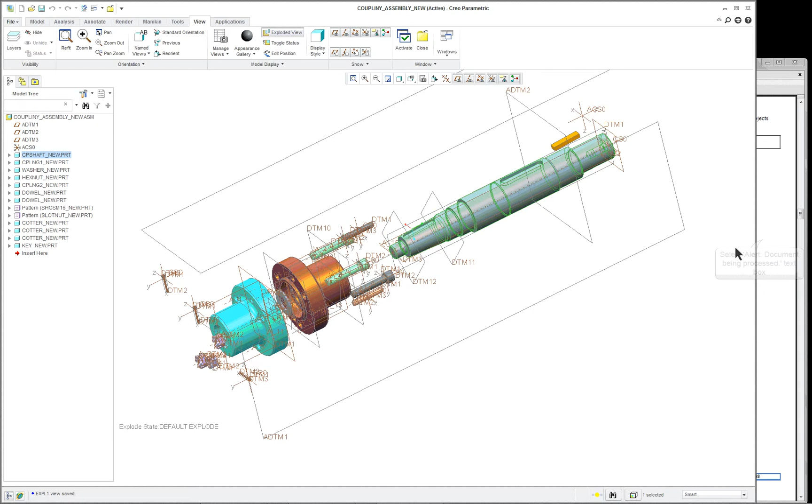First in this lecture we'll do just the coupling shaft. All the dimensions are provided for you, but as far as the step-by-step, we'll go over how somebody else approached this project. It's not necessarily the best way to do it. In fact, there are a bunch of things we'll talk about being poor procedures and maybe not the way you should do it for the correct design intent.

So I'm going to open up the shaft and we'll take a look at it. I'll go to my tools and model player, and as always we'll back it up to the beginning and we'll step through it.

One of the things you'll notice is they did all of this work with one command. This feature has actually too many aspects to it. There are ways to simplify it, and if you don't simplify it, then you should build it piece by piece, and we'll show you what we mean by that in a second. You have the taper here. This is the most important aspect of it.

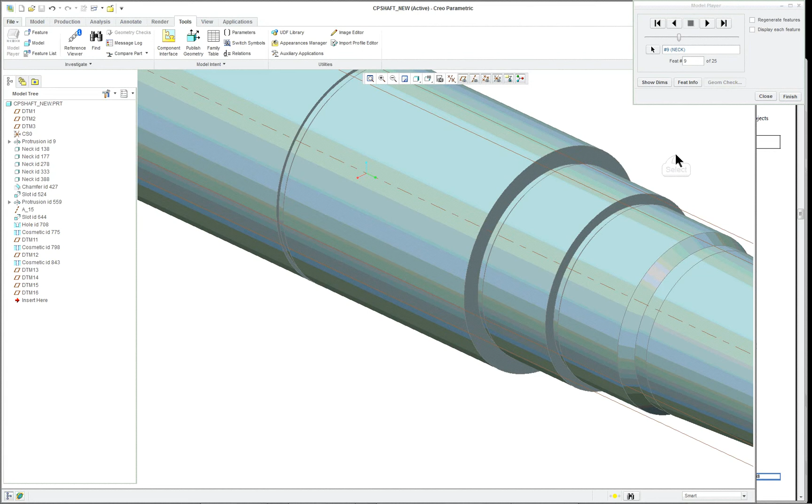So the very first one is a cut called the neck. This is an old style command. It's really just a revolved cut. You can see that was put in here. Same way up in the front here, another neck command. The neck command really is just a fast way of doing a revolved cut. Let's go and refit it.

Some of the choices are made for you because it's going to be a default. But again, we don't have that particular feature turned on, so you're not going to see that in the commands in the dashboard. So we have a lot of small items, and then we have this slot that's put in the top.

Another cut. This one's a radius actually. It's a radial cut, kind of an odd way to do it. And we have our slot here. This will be the one that we have to do a little bit of construction geometry to get.

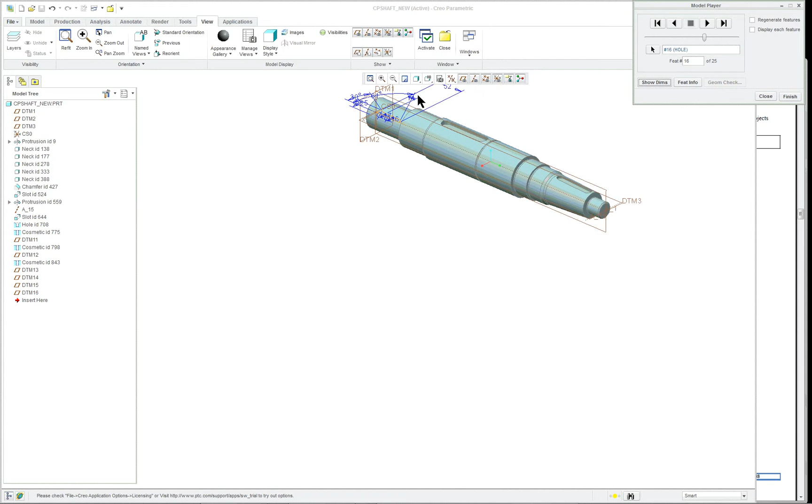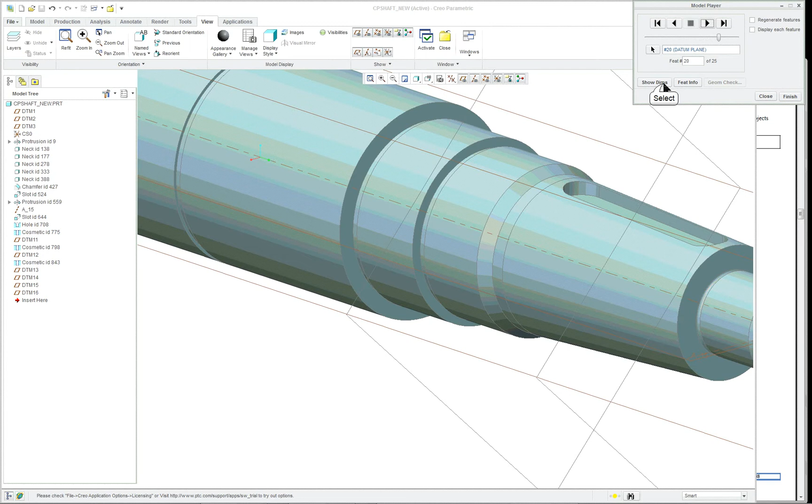And in the back here we have a hole, kind of a complicated hole. You can't use a standard hole here, and that hole has a thread on it. We have a variety of other types of cuts and things we're putting on here. Most of the items are fairly simple, except for maybe the tapered slot here and the hole in the back.

We have some variety of datum planes that we're putting at the very end. These datum planes are there so you have an ability to cut sections along the part when you're doing the drawing. You can see the sections have been provided for you - Section A, B, C - and needed datum planes to pass those sections through.

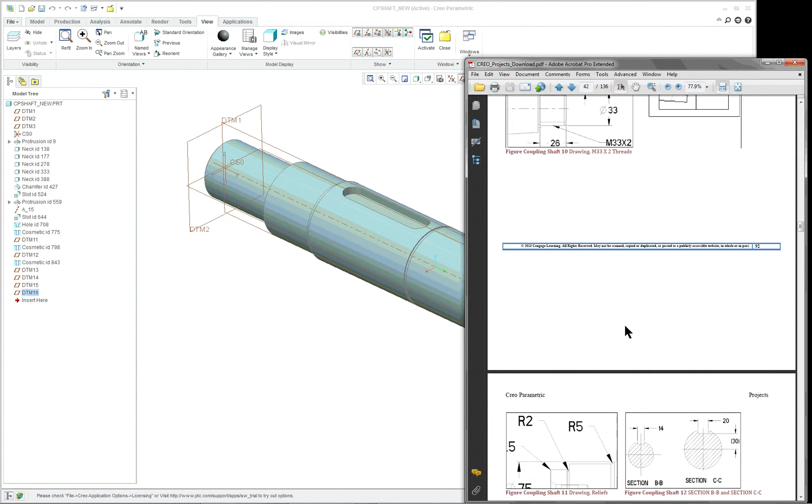All right, so let's look at the first feature. We'll go to the placement, and you'll see this is quite complicated. What we want to do here is turn our section. I have a cold, so I'm sorry about my voice here. And we'll click on this.

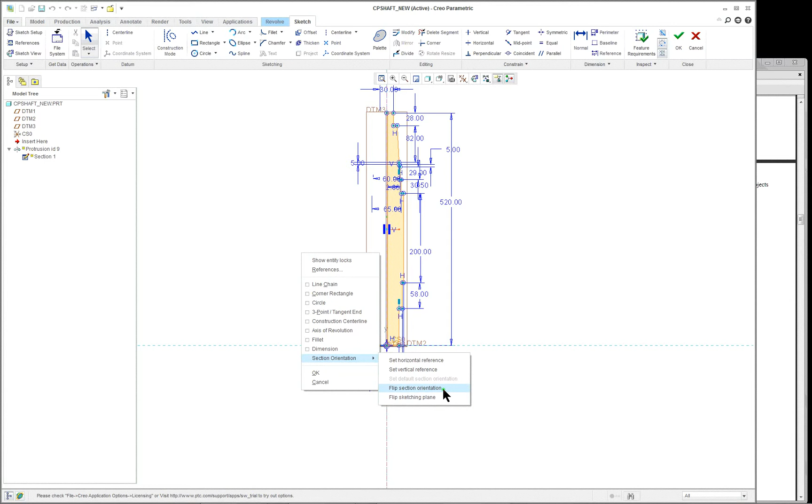Let's see if we can get it to go. Section orientation, set vertical reference - how about this one? All right, and I'm going to close my model tree over here so we can see a little bit better.

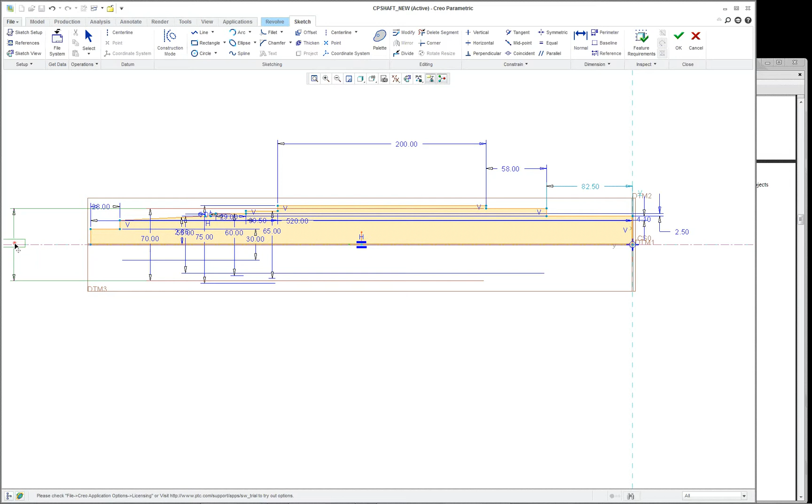Now we'll see we have a lot of diameter dimensions. We do have a lot of stacked up dimensions too, so I'm not saying this is the best way to do it. You're going to have to use these dimensions to create the part, but you also might want to do a better dimensioning scheme and not have so much tolerance stack up here. The most important thing here is this dimension, the 2.50. That's one of the most important things. Making sure that this, kind of an odd size to it here, whatever it says in the book, make sure you go by it.

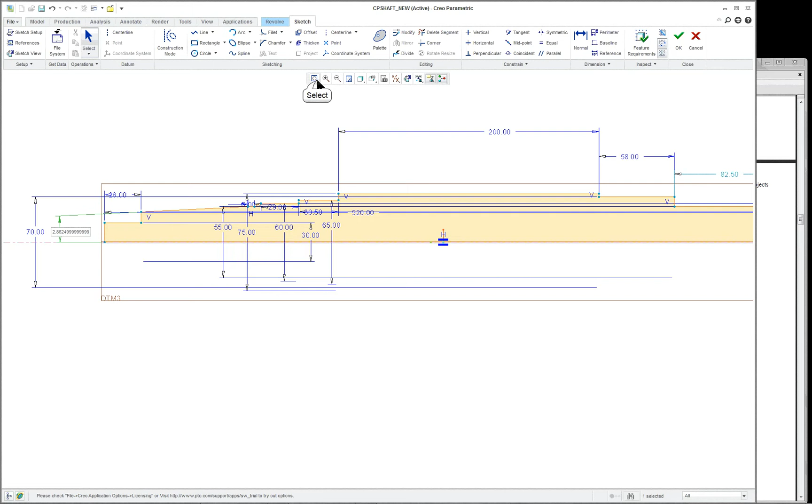What you want to do is match this angle with what's going to be on the taper coupling. So that's going to be important.

One of the things that people do when they try to do a complicated section is they try to do it all at once.

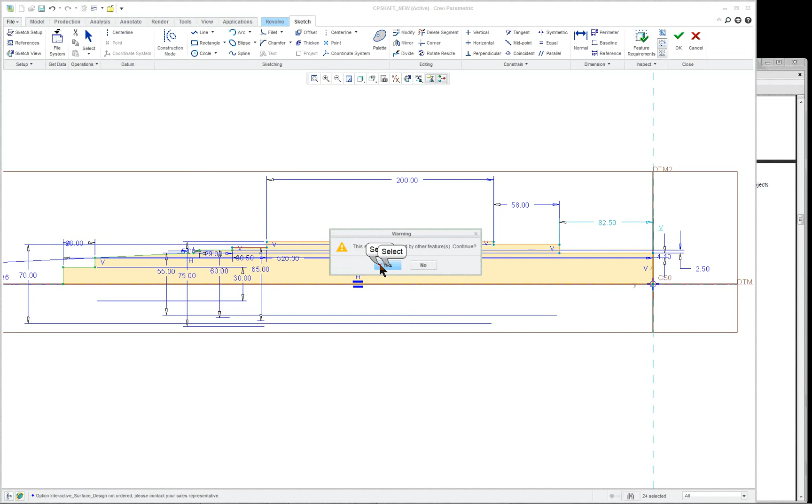And we can see the section here. I'm going to delete this one, and I'm going to put in from here to here.

Now, the reason for doing this is when you do just a portion of the section, you finish it, come completely out of the command, and then you save it. Then you edit the definition of it, and you do it again. I hate to do that. Well, we can try it.

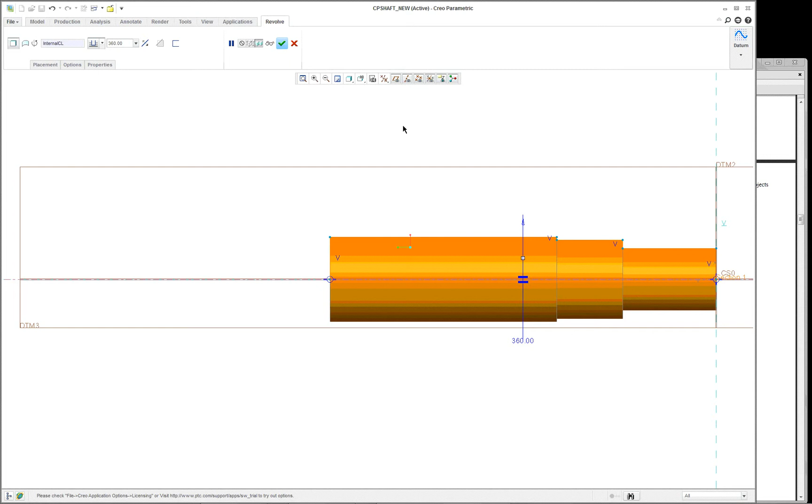Let's see what happens. So here we are. And a lot of stuff is not going to regenerate, obviously. But this is what you have completed in the very beginning. So you say, okay, this portion of it is okay.

Edit definition, you go back into the section, and then you add the other material on. You continue your sketching. Obviously, you're going to have to delete these.

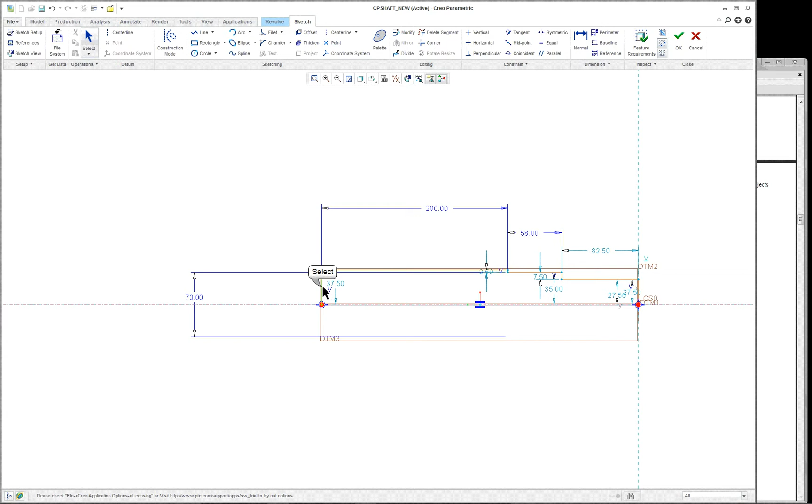And so, for instance, I can't remember exactly what it looks like, but whatever it is that you're sketching now, no matter how complicated it is, you finish this off.

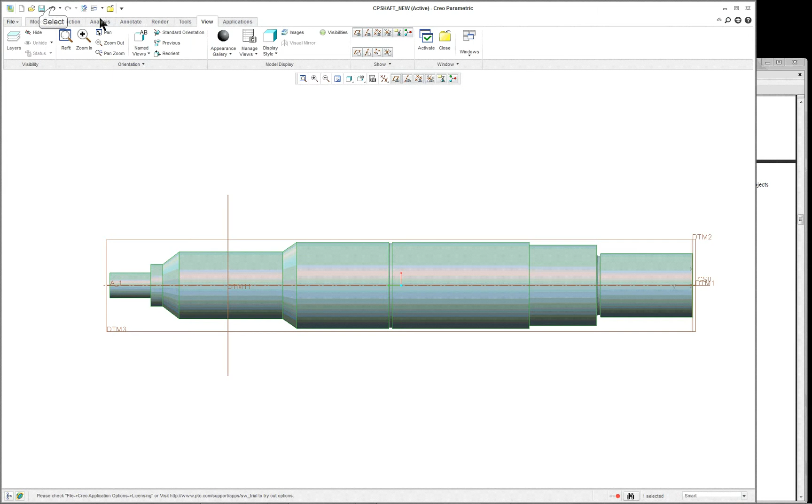Adjust your dimensioning scheme as per the requirements of the design. Finish it, and save. Now what that does is allows you to work incrementally rather than all at one time on a section. So let's see if we can go all the way back.

There we go. You'll notice I have a different default orientation and a standard orientation. And the default orientation is based on isometric at this time, because I set that up in my options. So under model display, I did change this to isometric.

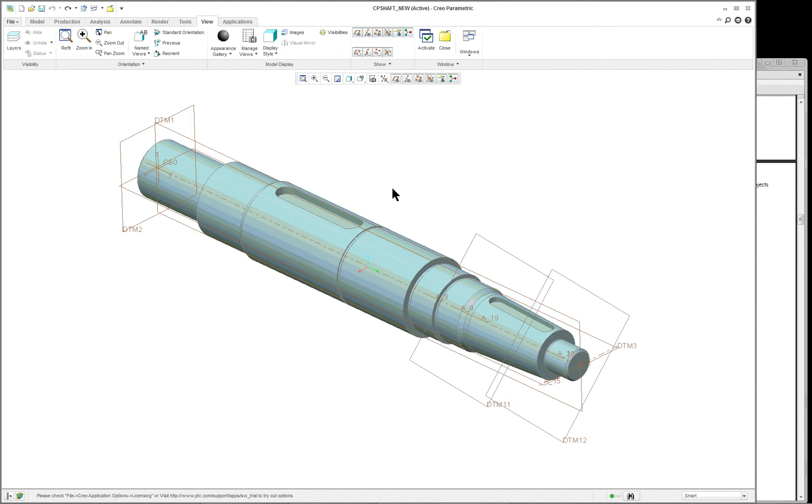After I'd done that, I wanted to see if I could get another good view. So for instance, the view that I created was the default. The default and the standard orientation are the same in the very beginning, but you can reorient the default.

So as an example, if I wanted to, this one is looking this direction. Let's say I wanted one looking in this direction here. And I'm going to go into reorient, and I'm going to click on default orientation and save that.

It's going to override the one that's there. So now I can go Control D, goes into isometric, standard, and then the default, it'll go over to here. Let's say this is what I prefer to work with.

So we did the primary feature, the very first feature, most important one in that case. You can see I got a bunch of neck commands in here, which are, again, are a little odd, but we'll investigate some of them.

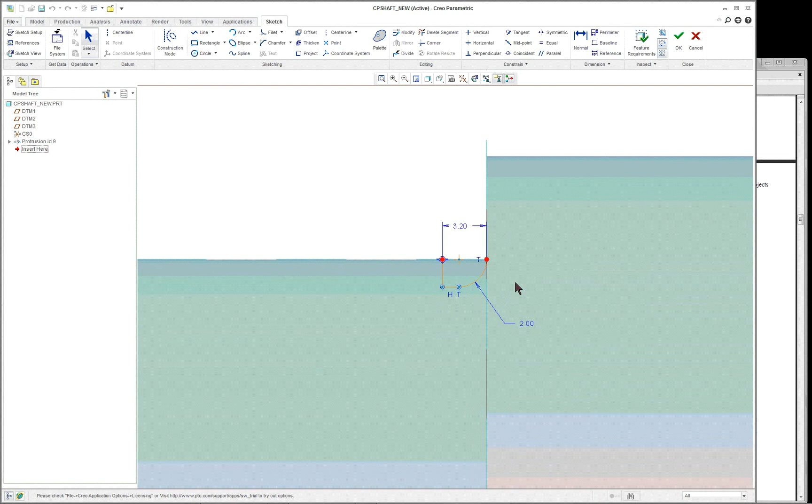So let's go back up here to the very first one. And you can see the neck command comes with some odd menu manager. This is a very old style command.

And this is the cut that they put in there. They could have made this as a closed cut also. So let's just do one of them.

Let's suppress that, and let's create a cut. So we're going to do a revolved cut, remove material, and we're going to use the datum plane down the middle here. That's going to be our sketching plane.

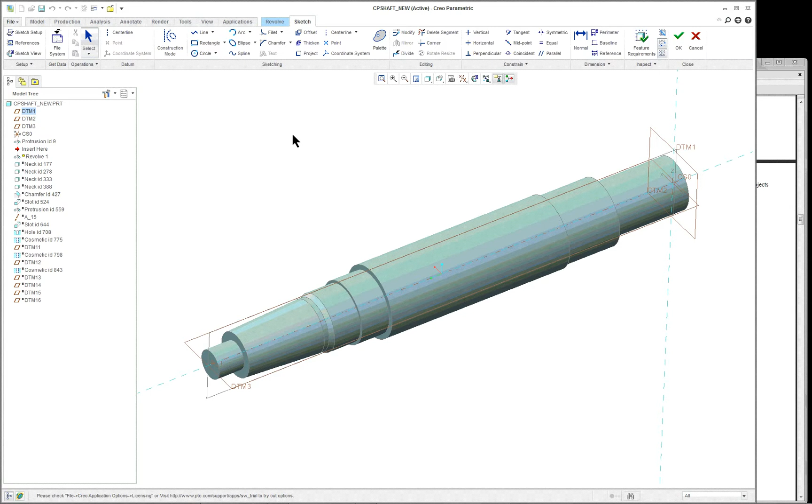Go into the sketch view. I hate this, it's turning it the wrong way for me, at least. Horizontal reference, let's try moving it like this.

And to be honest, I forgot where it was, so we'll just do one up in here. It doesn't make any difference where we do this cut. So I need some references, and I can select my references, like so.

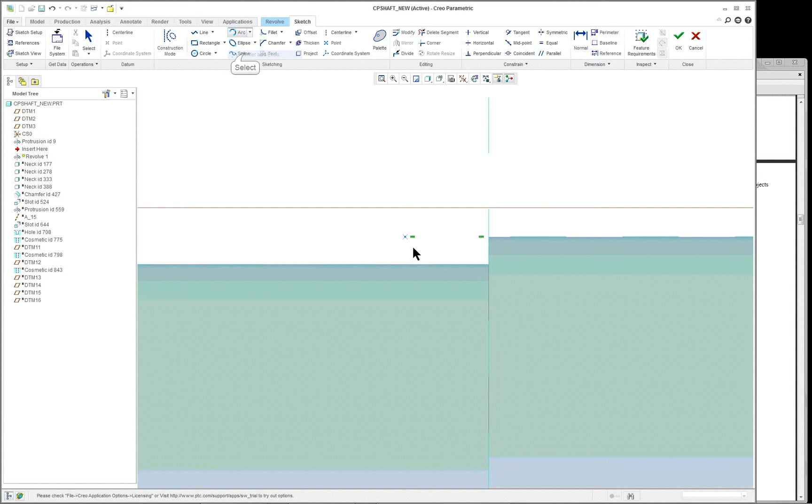And then I'll need the cut. We'll make a closed section, so I'll use an arc and 3-point. No, let's do an arc and center ends. So center and then end. And then line.

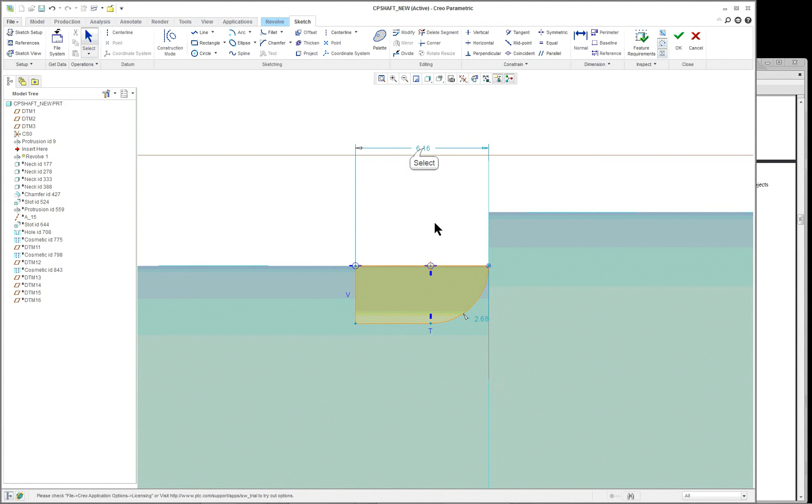And I'll go all the way back because ours will be closed. And you can see that's how we could quickly do our revolved cut. The neck command would have eliminated a couple of those selections for the attributes.

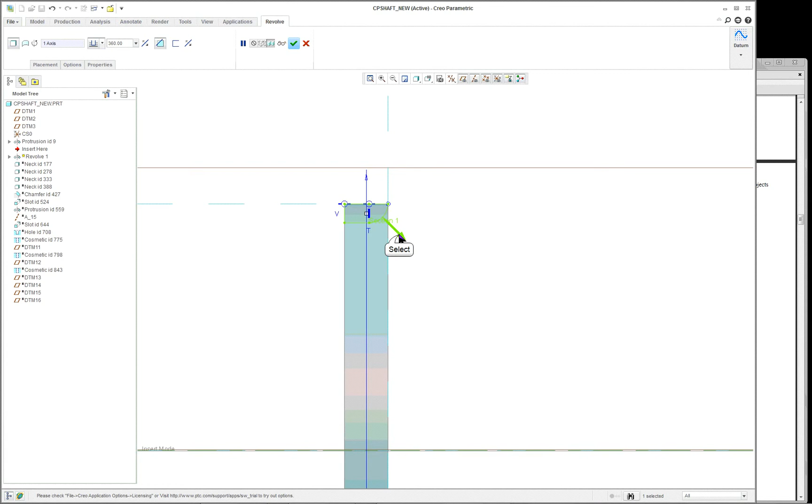And I'm not getting it to revolve because I did not do the axis of revolution. So I need this as my axis of revolution. So I selected it. You can see it's going to remove the material. Obviously you don't want to remove the material that direction. And that would be the cut. So it's relatively simple. You can change the dimensions here, by the way. You don't have to change it while you're doing the actual sketch.

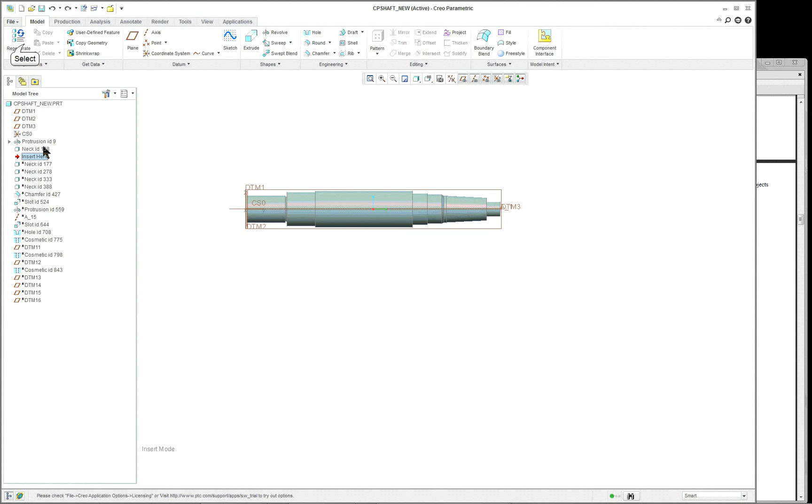So again, let's back that up. Yeah, it was over here, not over here. Doesn't make any difference. So you've got a lot of regenerated here. Let's see if I can get this to move. You got a lot of different cuts, different styles. But again, they're all pretty much the same as far as your methodology goes. So you use the neck command all along rather than using any revolved cut.

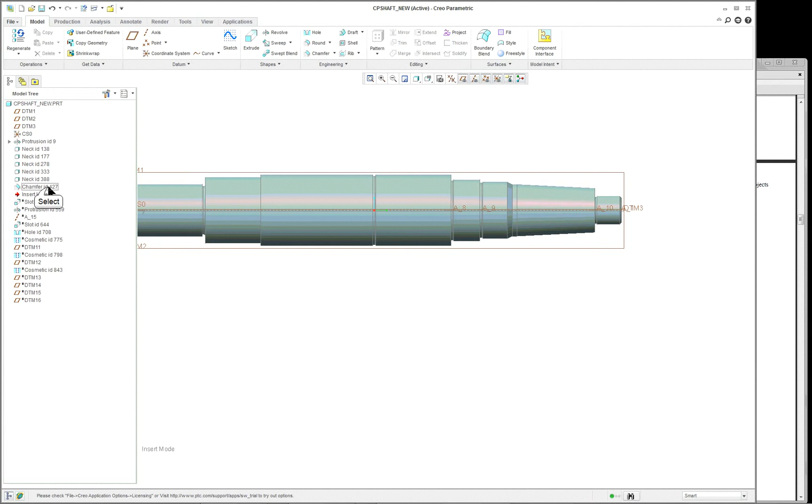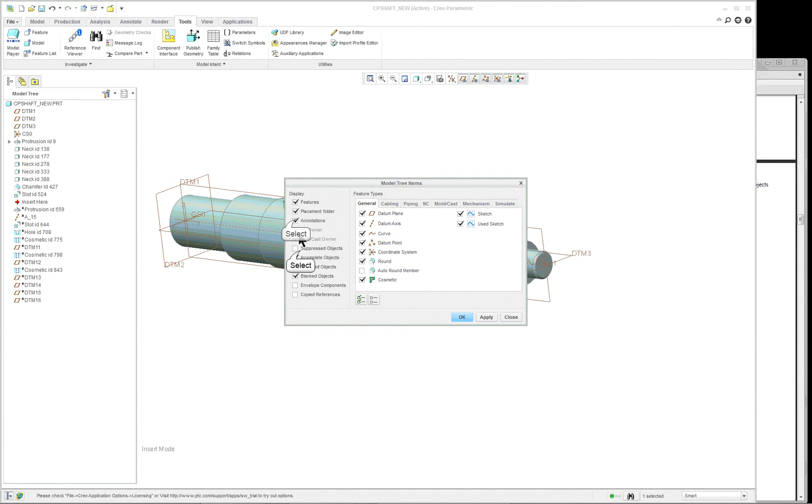We'll go all the way back out to the chamfer, which is at the end here. Nothing particularly important. Now the next one is the slot. And again, this is an old part. Look at our file history. We are looking at 1996 again. So this slot here is going to have some requirements, and one of them is it's going to require that you put a datum plane that's tangent to the position of the slot. Let's turn everything back on there.

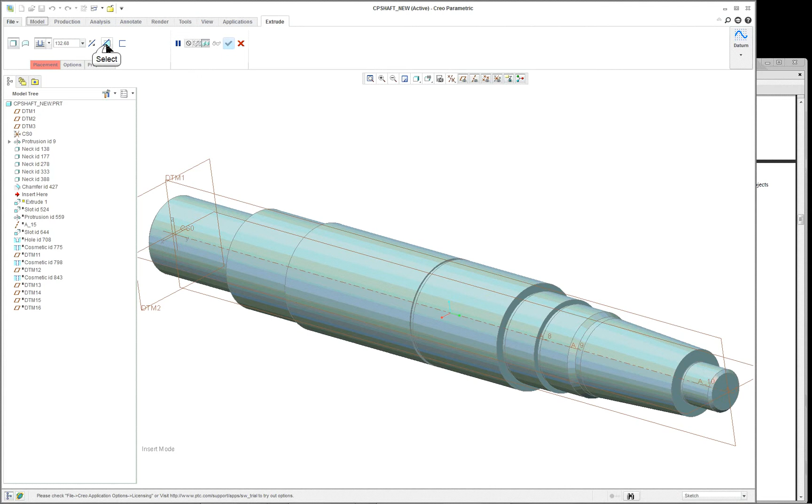So let's suppress that. We know we're going to put a slot up here. So the first thing we want to do, we can actually go into the command first, or we can create our datum plane beforehand. And in this particular case, I think we'll go into the extrude tool, remove material, and go over here to the datums and put a datum plane in first.

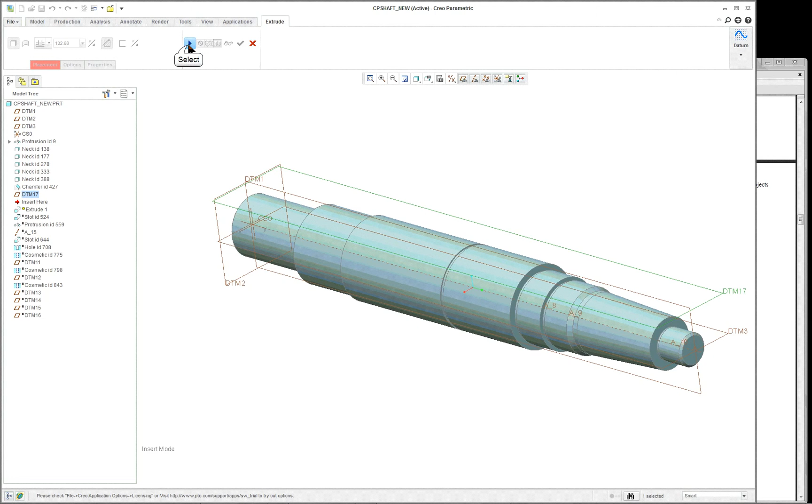So I'm going to pick the surface here, and it says through, and we don't really want through, we want tangent. And then we want to hold down our control key and gather another one. In this case, you could use this one in parallel and this one in normal. Normal came up automatically. Click OK. So that's my sketching plane. Continue with the sketch.

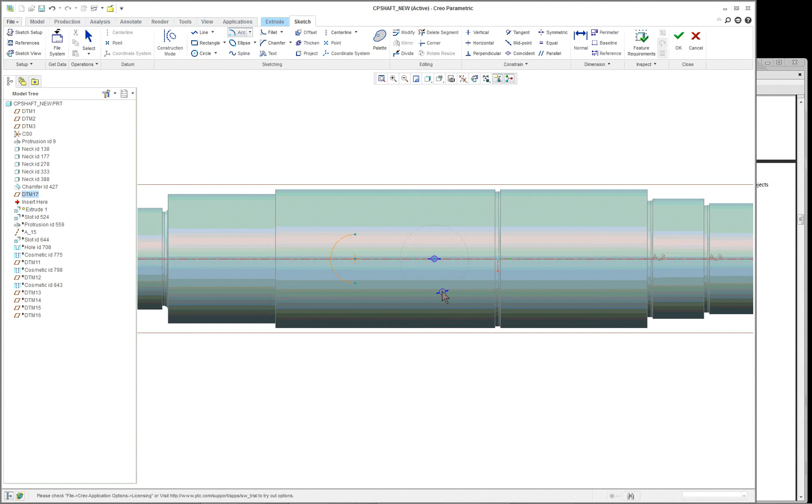And I would put a construction center line down the middle. And then use my arc command. There's a variety of ways of approaching this. You don't have to do it this particular way. You can also use tangent circles. And finish it off with a line.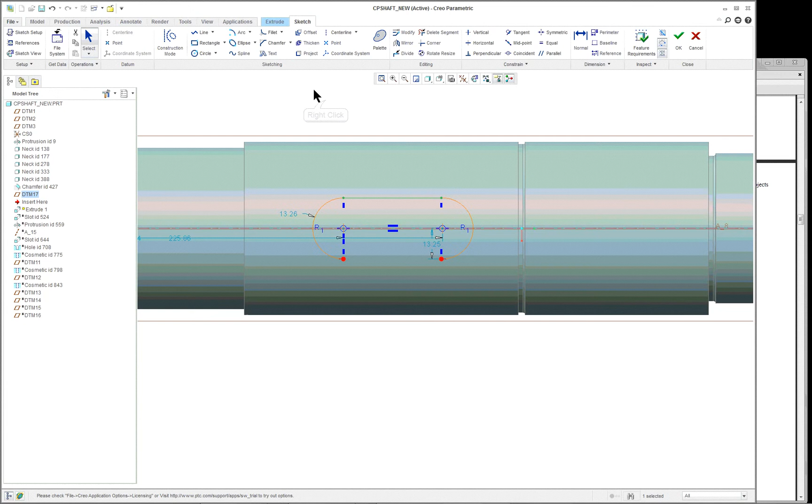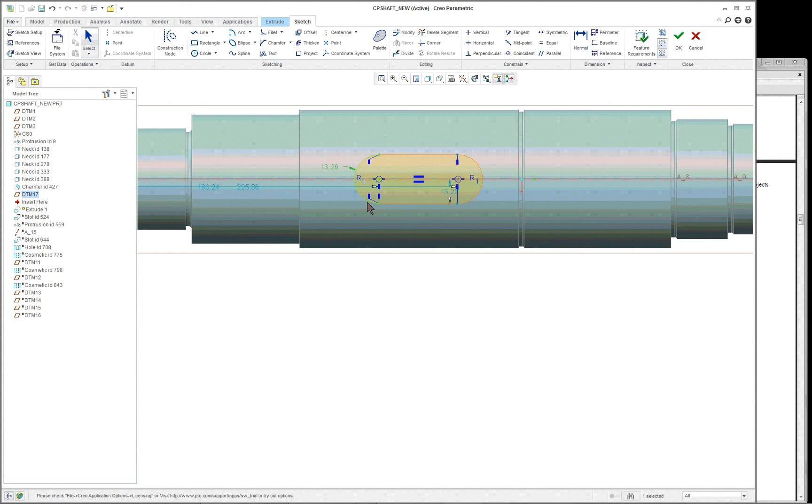Now, if it's not tangent, or if the constraints don't work well to control it, then you're going to get some extra dimensions. And it looks like we do have some extra dimensions here. We have a dimension here, which is okay, but you have another one over here. So something's incorrect, and you need your distance between the two, so you're going to add a dimension. But before you do that, you could put your tangencies in there. So that got rid of one of the dimensions. Now you can continue around, but it's saying it's a valid section now.

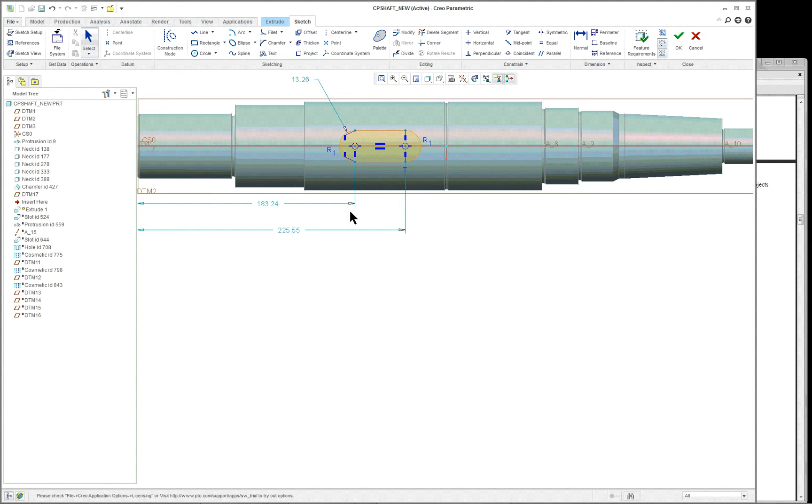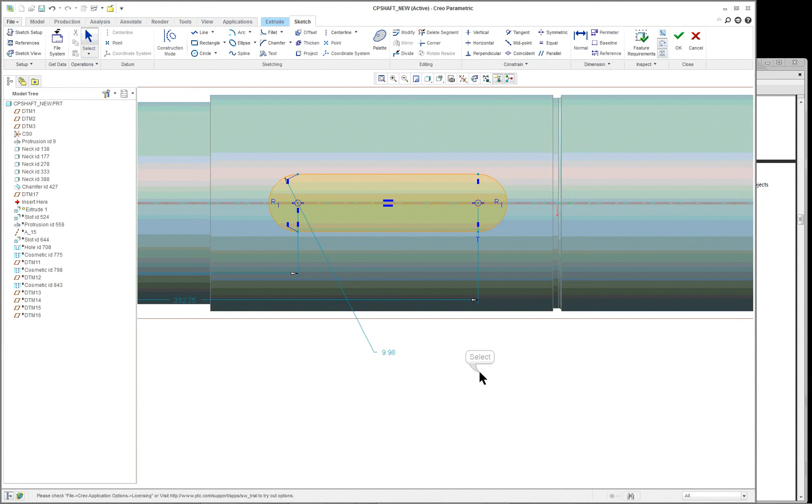Let's move the dimensions out. And again, you'll see, depending on where you're going to dimension from, you probably want the distance between, or in some cases the slot is done from the tangency to the tangency. Depends on what type of a slot it is. So you could move this around, adjust it, and again, put your proper dimension in there. And you see R1 equals R1, so you only need one of the radiuses. Of course, you want to limit how far down it goes, so it's going to be a blind cut. And you're done. So that one's fairly simple.

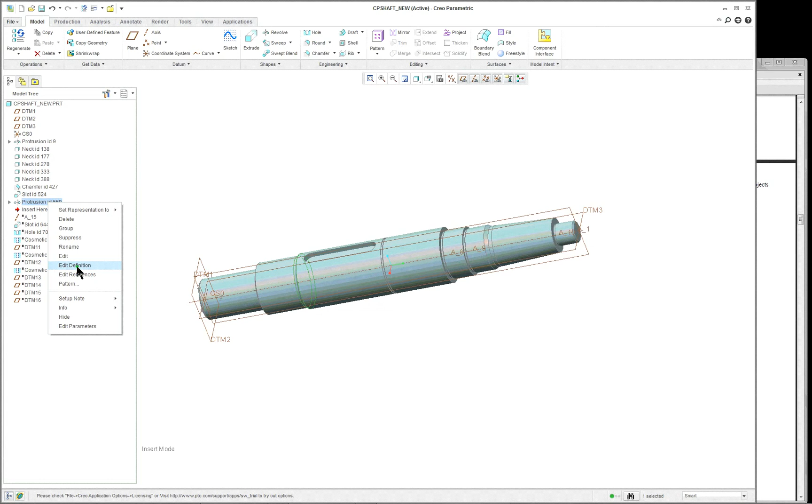And I think what we're going to do here is we'll go to our, it says protrusion. Let's see what that one is. Okay, so they added, this is kind of interesting. First of all, I don't think it should be done in this order. If they were doing all the necks, why didn't they do this one also? It's not really a neck, but you'll see what it is. We'll go into the sketch. It's kind of an odd choice. They put in a section, closed section, with an arc in it.

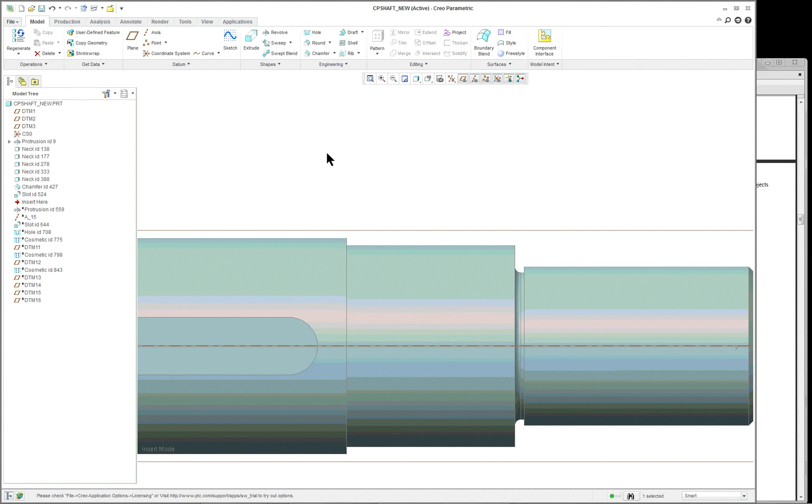So let's cancel that. And let's suppress it. And let's see if we can find an easier way to do it. Let's go and select our round tool. But this time let's pick the surface and then the edge. So surface and edge. So that's not going to work. We're going to have to do a cut instead.

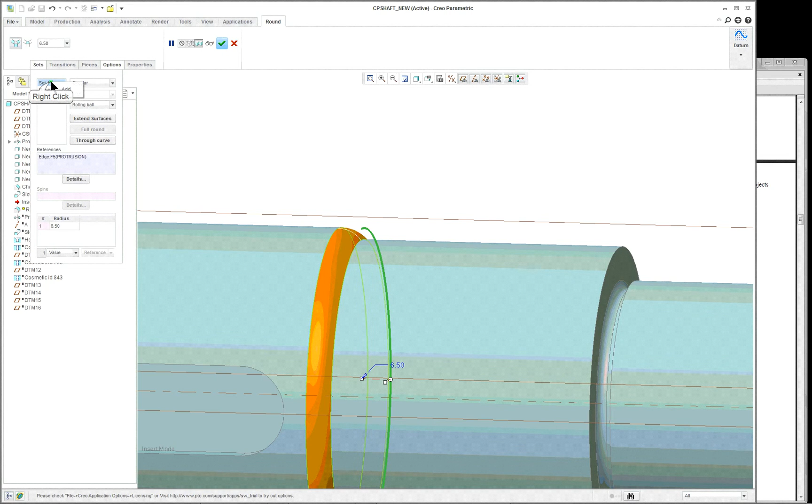Let's try removing this one. So let's pick the surface and the surface. So got the edge as one reference and the surface as the other.

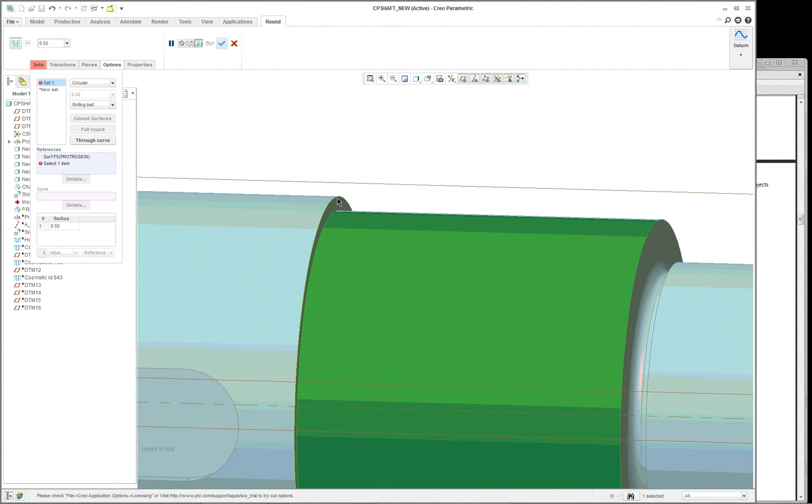So let's do it again. Got your round. Look at our sets here. Our references, surface, and surface and surface. I held down my control key. And you see we can actually adjust this. This gives us what we really want, but we could adjust it. There'll be a place where it fails, I suspect. Oh, no, it doesn't. Very good.

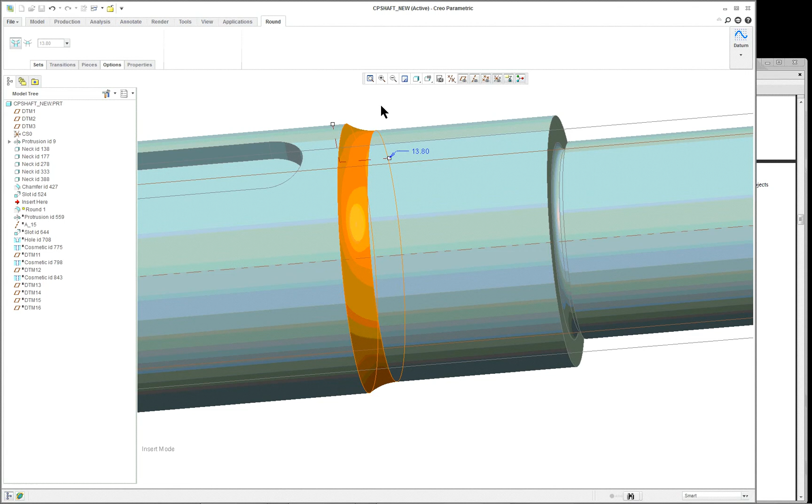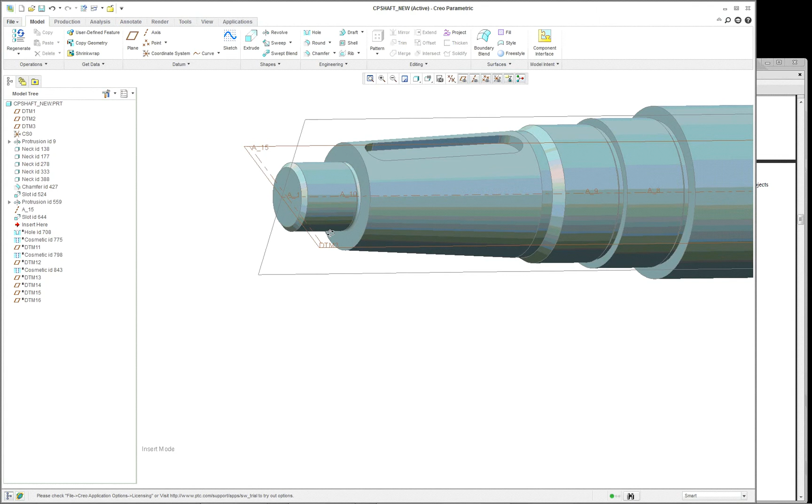All right, so that would work a lot quicker than the method that they had, which is putting in the protrusion. Now they stuck an axis in here. I'm not sure why or where. Put one at the end. That's a little odd. Again, the methodology, don't have to use it exactly. Next one is the slot. Oh, they were probably using it for something to do with the slot for some reason. So I have the slot here, and actually I'm going to turn the slot. For some reason I prefer to look at it in this direction.

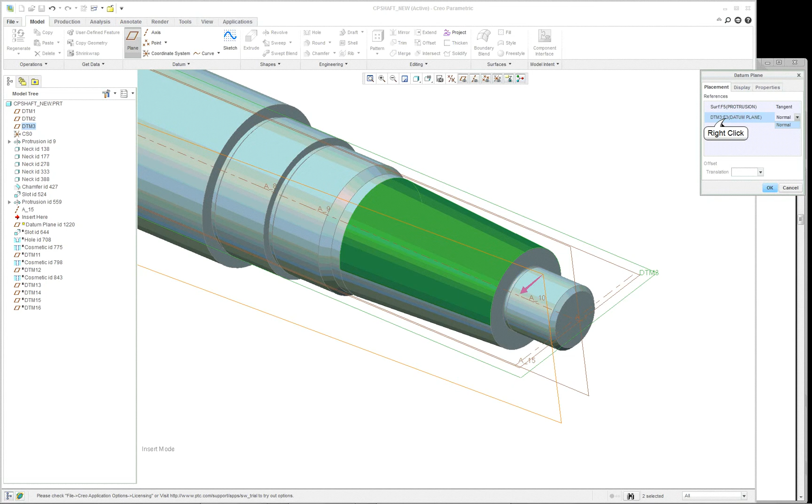So let's suppress that. And in this case, let's put the datum plane in first rather than during the command. So we're going to select the surface here. It's through. We want to turn it to tangent. And we will select, for instance, let's select this one and see if we can just use parallel. Nope, it wants normal. So let's remove that. And that will be normal, 90 degrees, perpendicular. You can see the angled datum plane.

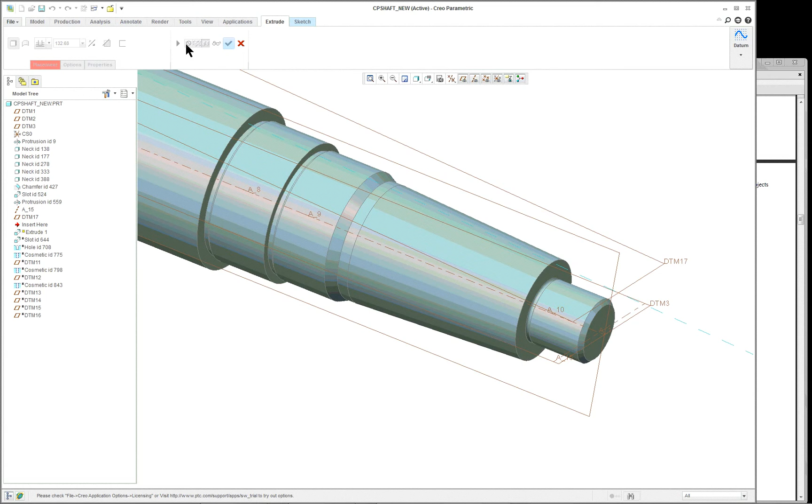Now this one is external to the command. The other one was inside the command, therefore it was hidden. Here it's not going to be hidden. So that'll be our sketching plane. We're going to extrude. Actually, by doing it so quickly here on the extrude, you can see I forgot to hit my remove material. So we'll see what happens as we complete this one. Now, everything's at a little bit of an angle because we're looking directly into that new datum plane.

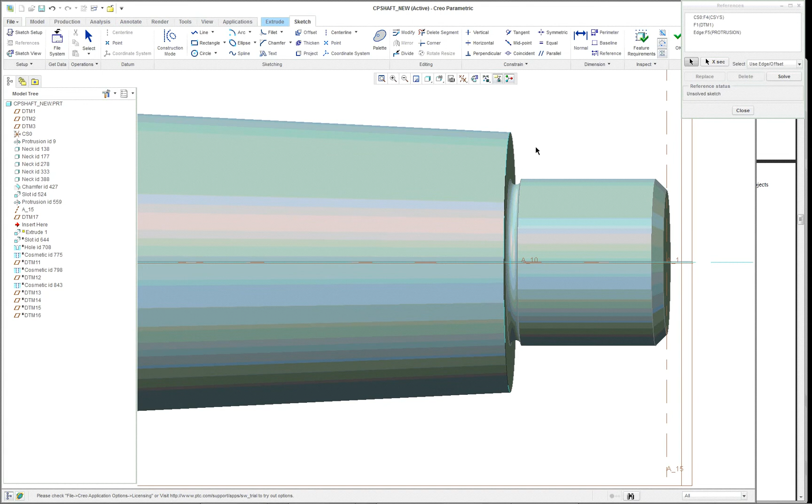We're going to start off with some references. And I want to pick this whole surface as a reference. Right mouse button. And pick the edge as a reference also. One or the other will work for us. We've got a reference down the middle. And let's put in a sketch point right here. Might use that. And then we'll do our construction, similar to the other one.

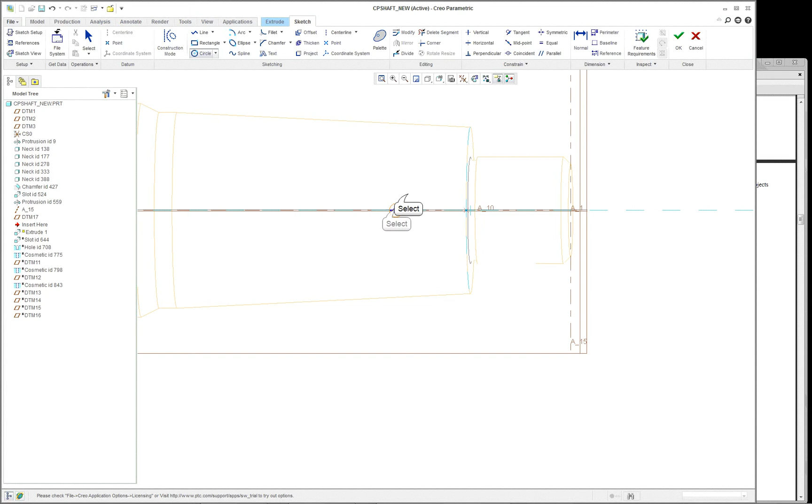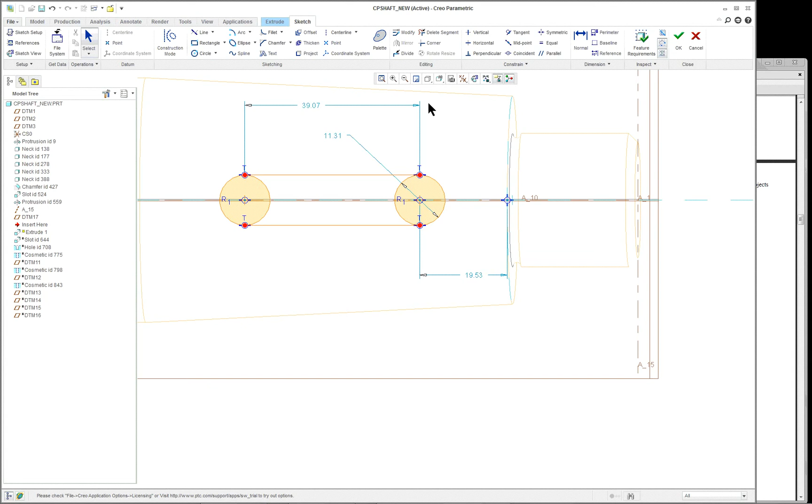And we could try something different. We could put in a couple of circles. Equal circles. And then connect them with a line. Tangent. Still active. Like so. Then we got to remove this inner arc on both sides. So delete segment, you can draw through this or you can just click on it. Middle mouse button, you'll see that you get that.

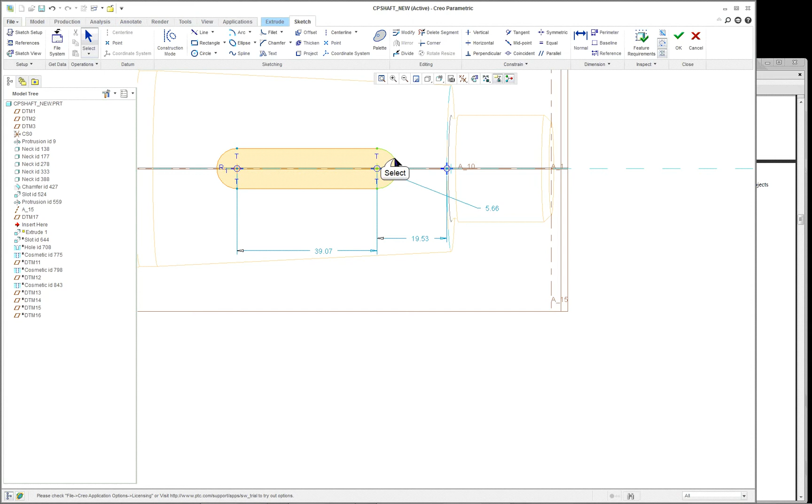Now by putting in this reference from the point, it actually dimensioned to it. If the dimension is not there, then you go from the center to the point here, and that'll be what you need to establish your dimensioning scheme. If you want to go from here to here, you can do that also. So for instance, you want to go from a point to the arc, and then middle mouse button to place it. Oh, it gave me that one. It didn't give me the one I wanted. Let's try the other thing.

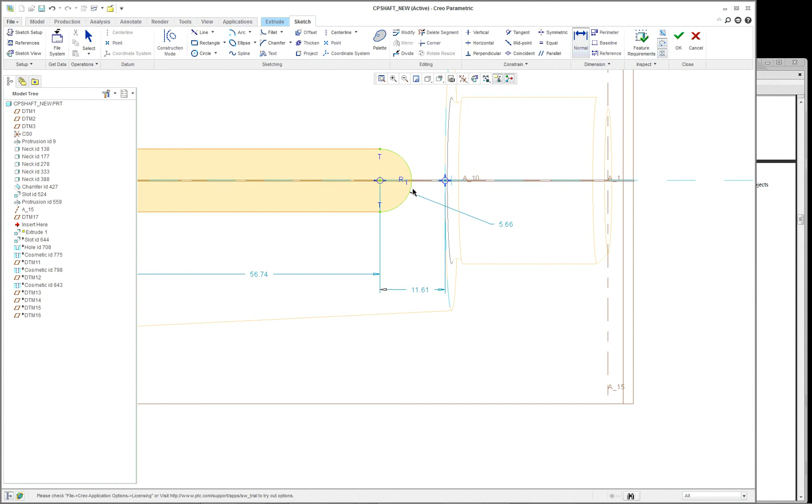I'm going to delete it. No, it wants it. So let's go up and add a dimension. And this time let's pick the arc first and then the point. Middle mouse button still did it. I was hoping to get it from this point out here. So I wonder if, well, I'll try one more time. Got dimension. I think what we're going to have to do is put a point in there.

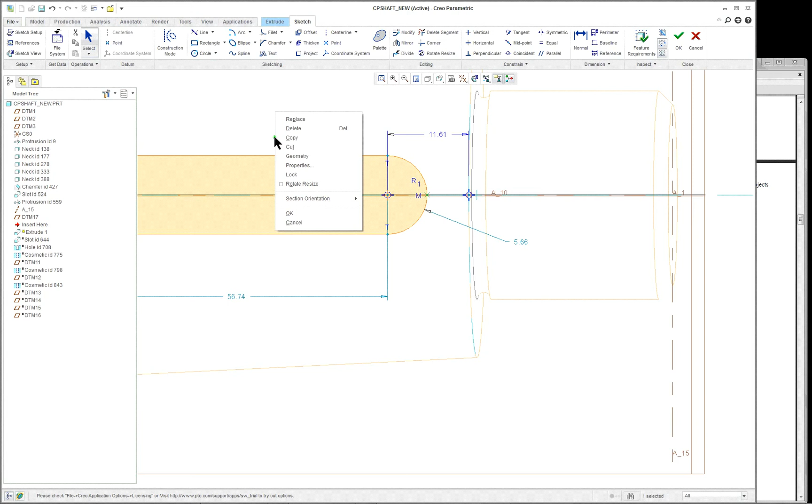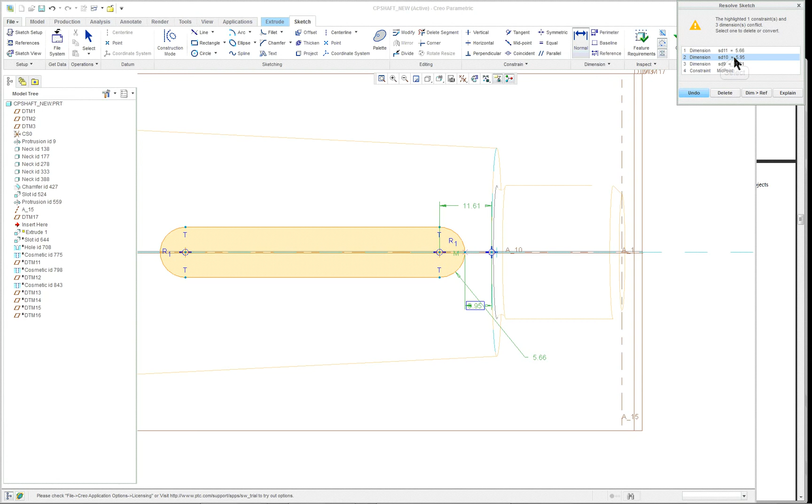So let's stick another point right here. And let's put a dimension from point to point. Middle mouse button. And there's my dimension. Okay. Now, if you need a dimension for the radius, you have to add that back in. And it says, which one of these do you want to get rid of? Wants one of these. Oh, they think it's equal. There we go. So we've got too many constraints in here.

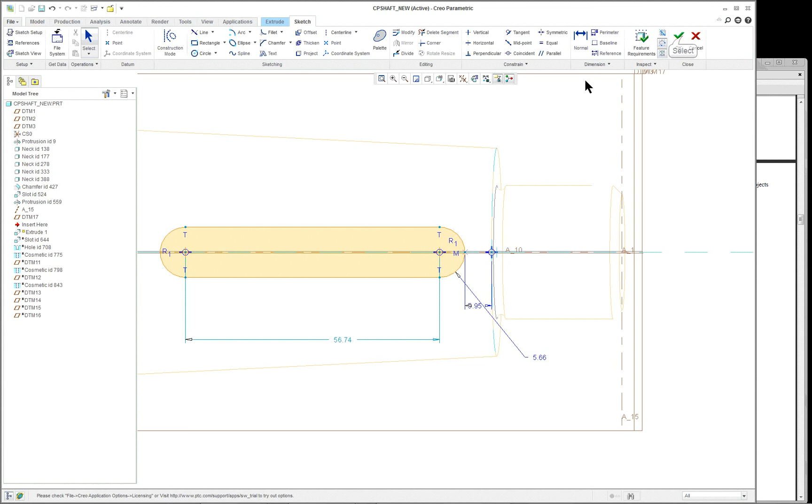R1 equals R1. So here's my radius. All right, now I forgot to remove material. So what happens here? It thinks it's adding. So I will remove material and then bring it down. All right, undo that one.

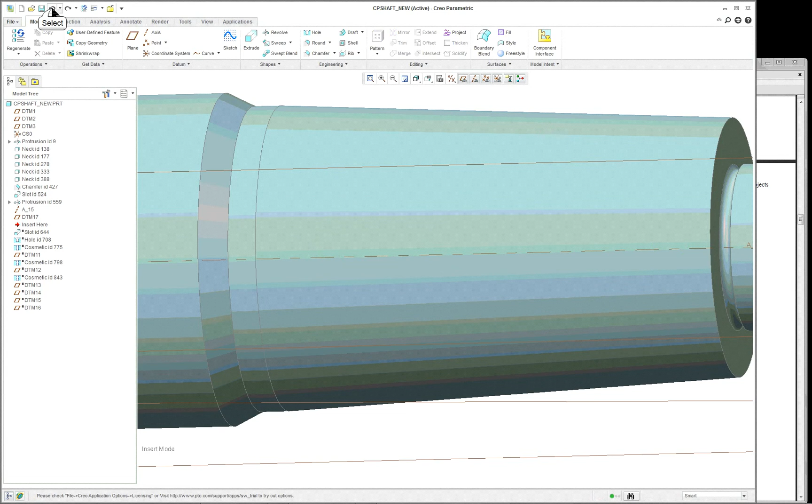And activate the hole. So let's look at the hole. Edit the definition of the hole. And we'll go into the section of it. You can see it's relatively complex. So you have to have a vertical center line or an axis of revolution.

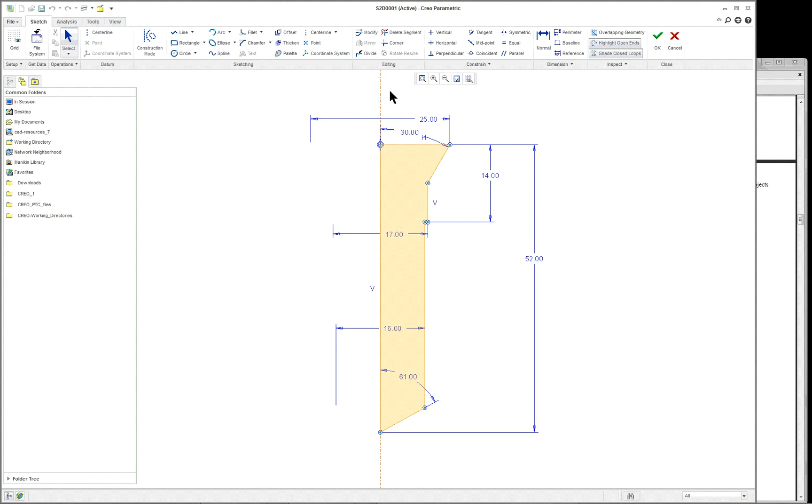Axis of revolution. They changed this. They used to have you put in the center line and then select the axis of revolution. So they streamlined it a little bit. Closed section, obviously, and it's fairly complex.

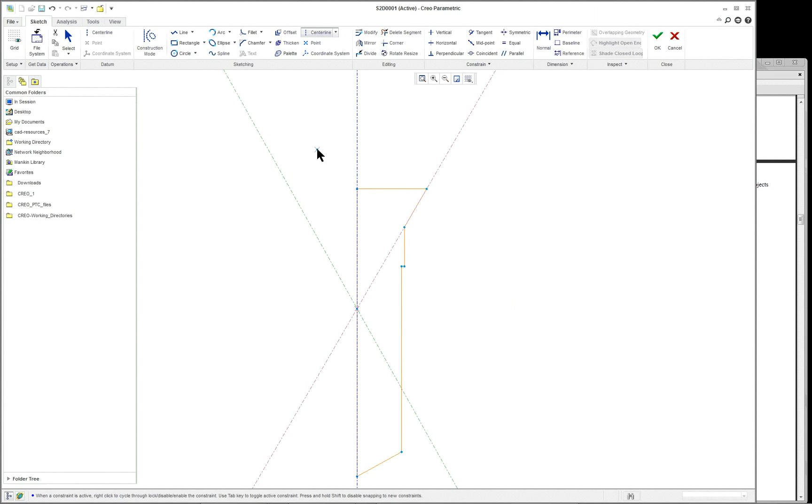Now, the only thing I would say that's incorrect here is that what I would have done instead, I'd have taken a couple of construction center lines here, like so, and a point, and another construction center line, like so, and maybe one more. Oh, sorry. And let's put this one down here, like so. And oddly enough, you still have to add a point, like so.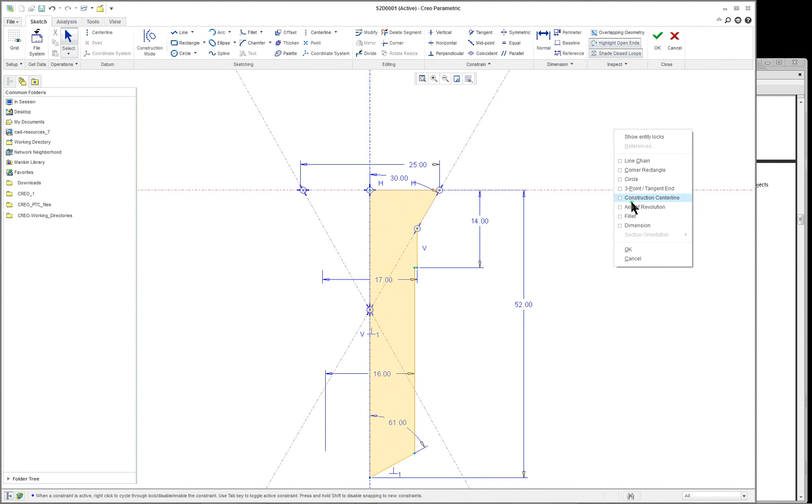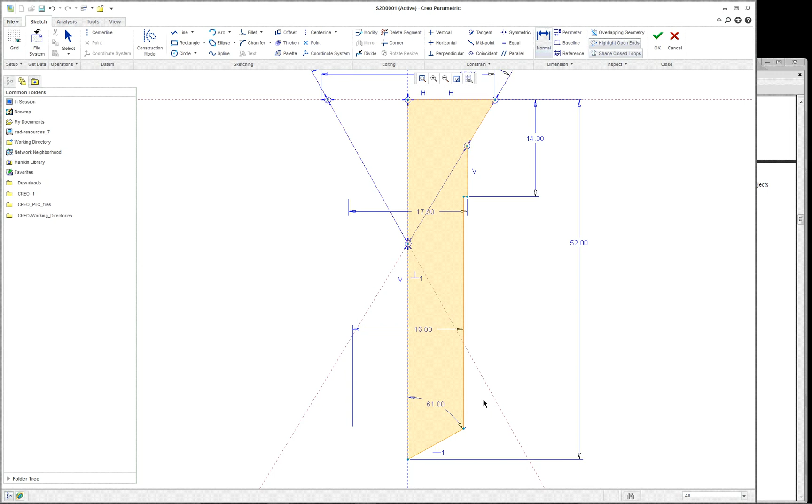So now you got your diameter dimension in there, but if you want another dimension, for instance, the included angle, and get rid of the 30, that would be more appropriate. This should be 60, of course. You'd have to do the same thing on the bottom to get that to be an included angle. So it takes a little bit of construction technique, but it's the appropriate thing to do.

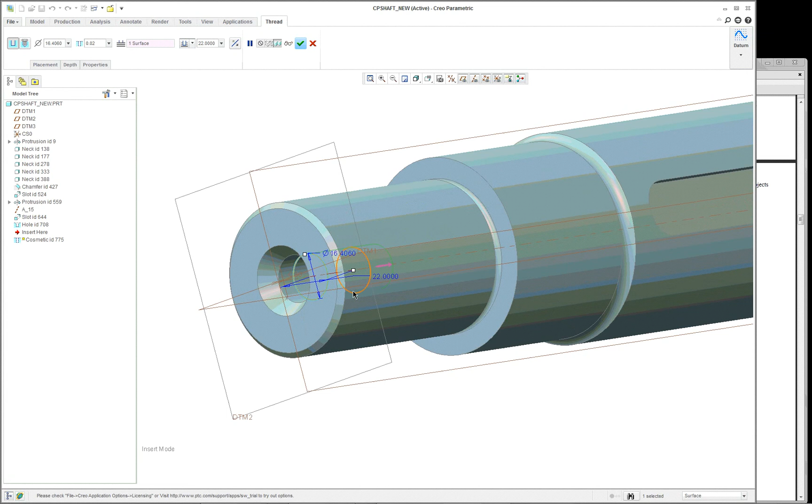There's your hole. Now, you have a cosmetic feature here also. And the cosmetic feature, in this case the thread, cosmetic thread, is only going to go from the lip here a certain depth. So you're going to have to select where it starts and then depth. So the start from here is this lip here, and it's going to have a certain depth.

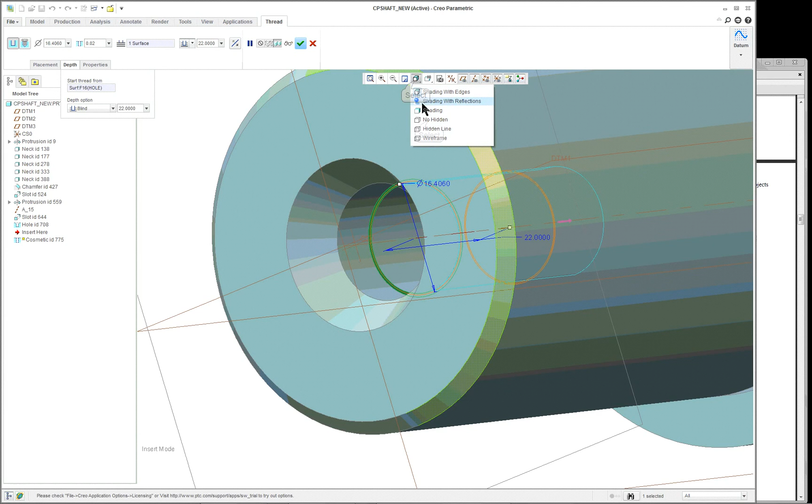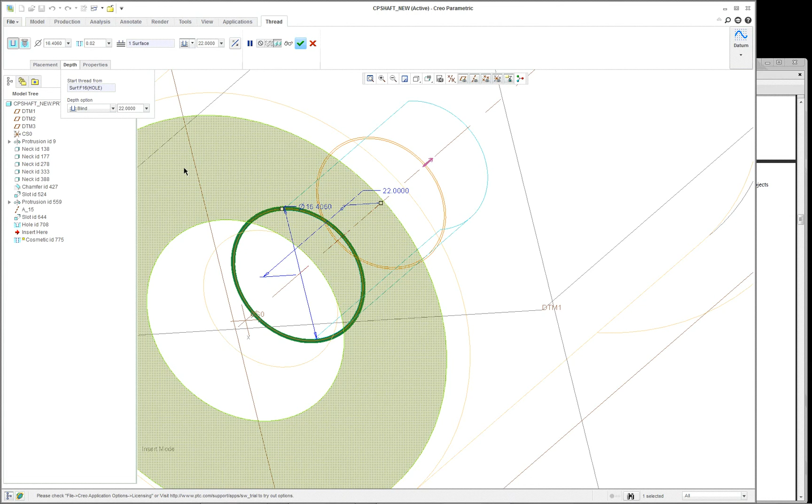If we go over to our no hidden line, we can see it a little bit better. If you turn off your spin center, then it will spin from the position that you're selecting. When you have a long or a large part, you need to do that. So here's your thread.

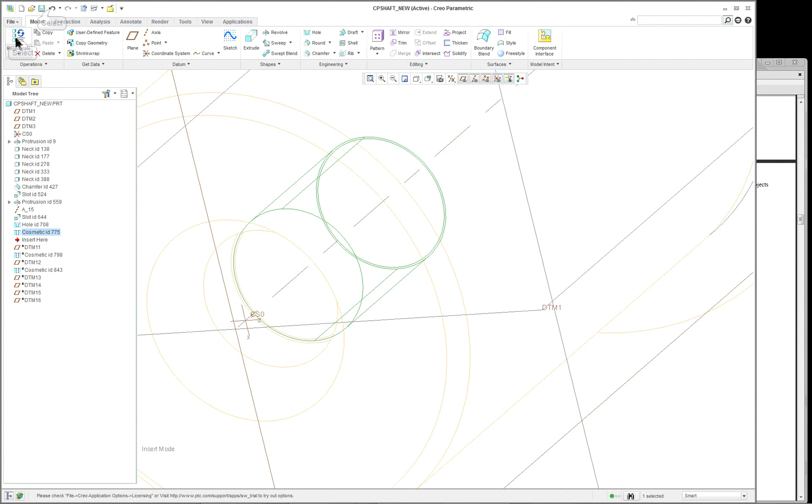And let's go to the command locator. Let me do it. Back out a little bit. Let's go to my shading. Doesn't want to allow me to pick in there, maybe because I've got so many things suppressed. But if you can't find the command, then what you need to do is go into, you can look through, oh, I've accidentally found it, come out, cosmetic sketch, cosmetic thread. So you can type in here to find that command.

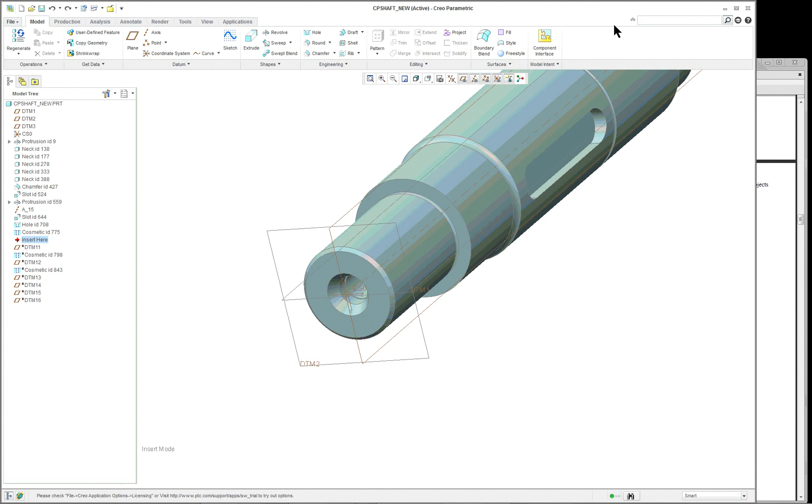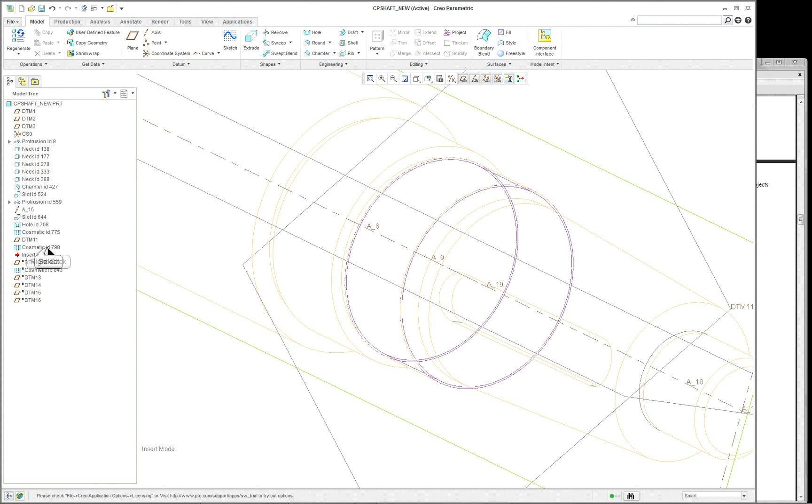Next, I added a few datum planes and another cosmetic thread. And this one is for the shaft here. Again, if you turn off the shading, you'll see the cosmetic thread is a magenta colored surface, no volume to it. In this case here, they put a datum plane in to start it, and then they have a depth going. It could have gone up to this little lip surface here. Maybe they did.

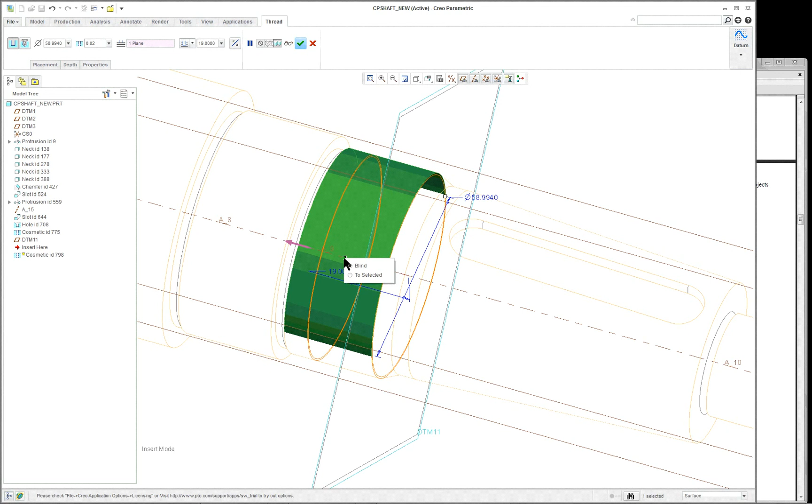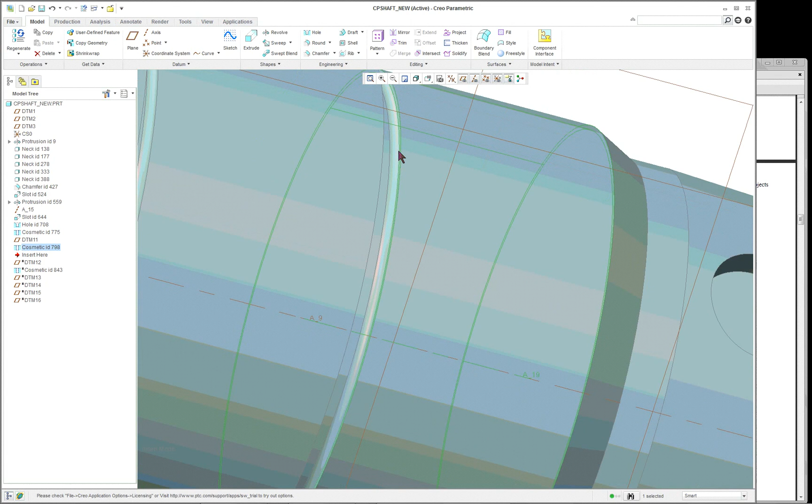To selected, let's try that. It's because it's a round cut. They wanted to go to the datum plane, or they wanted it to be blind. That's why they did that. I was hoping there would be some sort of an edge there, but there's not. That's the round. So to go up to there, they'd have to have something to click on to show where the thread is going to go to.

Put another datum plane in, and then they put another cosmetic thread in. This cosmetic thread is here. And they started from the surface. Threaded surface is green here. The depth, start plane, the datum plane here.

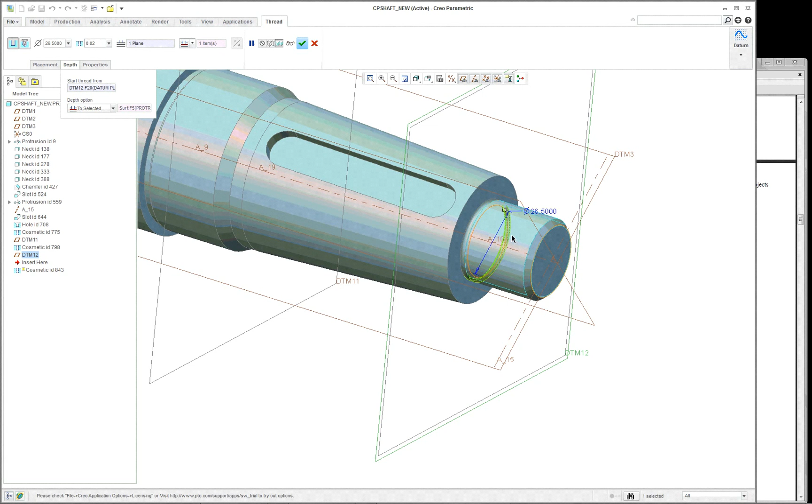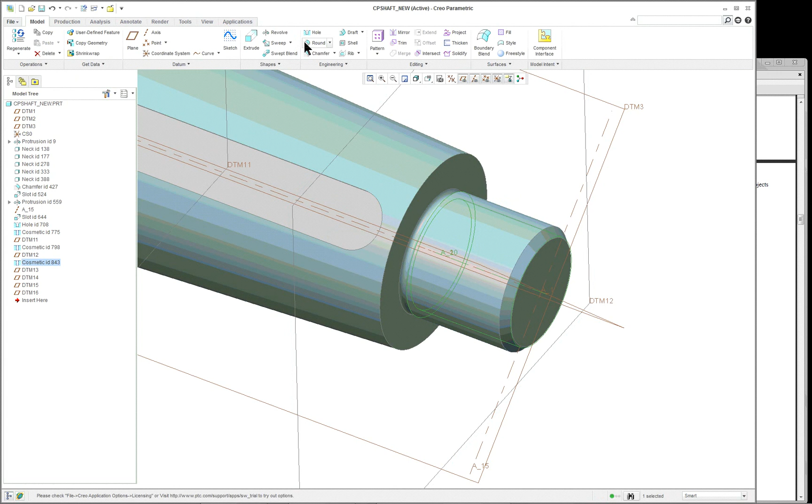Again, let's see. Now they can't use that round, so they put a datum plane through that edge. And they use that as the start. And then to selected, they went all the way out. Probably should have put another datum plane in here through this edge and gone to that datum plane instead. See how far back I can go here.

And default orientation. And again, these last ones are there so that you can cut sections. Last datum plane, so you can cut sections through here so that you can have your views and you're creating your sections.

It's kind of an odd name. You're not supposed to name anything like this. Must have been a reason they did that. That name, this AA, will actually show up on your drawing, so it's not a good idea to do that. This ends the shaft lecture.